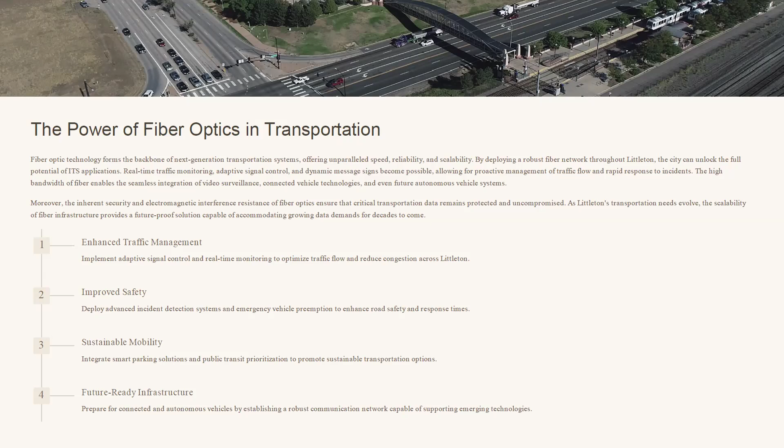Being Big Brother, the state and federal assume that smaller streets within a city are our own responsibility and we'll take care of them. They want to help when it's a roadway that has regional significance — where people not only in our city but others are using that roadway to get between places. That's why Broadway ended up becoming the focus first, because it was that regional roadway system.

We had a lot of other stuff going on, and we could find funding for it. So what we first installed was that section basically from Powers down to Arapahoe Road. That allowed us to get quite a few signals tied in there, but it also set the standard at the north end — if we were to connect with Englewood someday, now we're right near that border and can do that. It allowed us to get to Arapahoe Road, which was clear.

It allowed us to get to Arapahoe Road, which is where Centennial has their system coming in, and Arapahoe County does too, so we're able to tie into that. What we're doing on our own right now is Littleton Boulevard, because that's not considered a regional roadway system, but it ties Broadway back to basically this building — gets us back to where all our offices are, and Arapahoe County's building right across the street. So that's what we're working on now, putting fiber along Littleton Boulevard.

We're almost done with that design, and we have some funding for it. But of course, to your point before, Tom — when we started working on it, prices were X, and now they're 2X. Everything goes up.

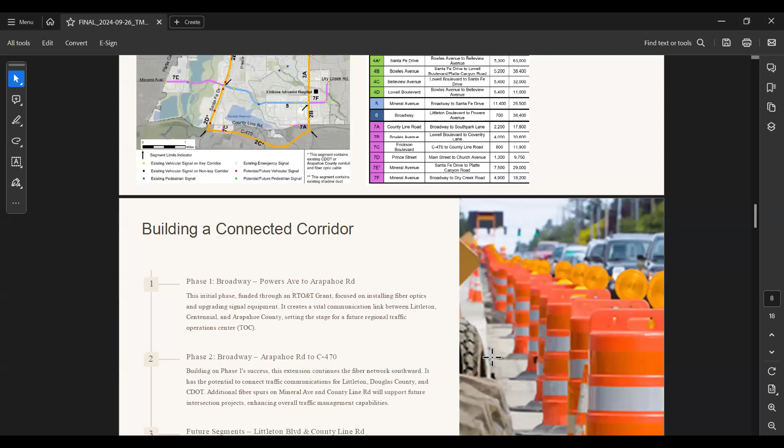Well, it goes way beyond that. Another part of it, when we put in fiber, we also upgrade all the other equipment at a signal. A lot of our equipment is very old and we've been prioritizing that also, to have controllers that allow us more flexibility with signal timing, leading pedestrian intervals, things we just couldn't do with our other controllers. They didn't have that capability. So one part is upgrading that equipment, another is connecting the fiber.

Fiber also allows us, because it's underground and you make it in a loop, to create a whole loop so you can get either way on it to everything. So if someone comes in and cuts that loop over here, we can still go the long way around and connect everything together. That's the other nice thing about fiber.

What we're using right now is radio communication, and it's line of sight. Trees keep growing, and you'd be amazed how many times all of a sudden we don't have communication. We'll go out there and go, oh yeah, that's why these trees have grown, and now it blocked your line of sight. So we don't want to have to keep cutting down trees just for line of sight with communication. That's another smaller aspect of it.

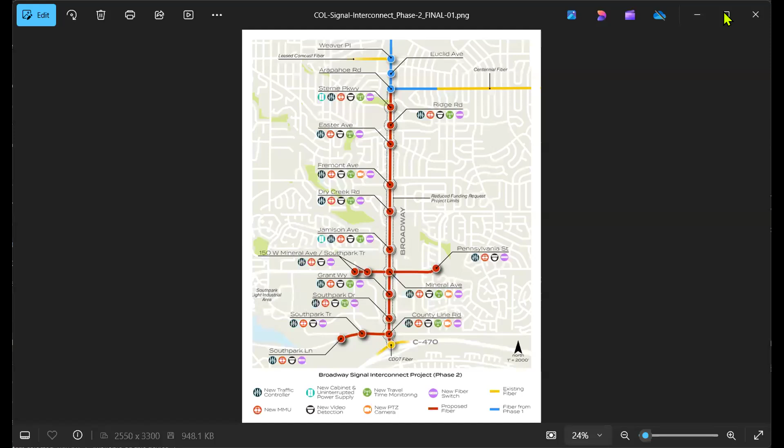But yeah, it gives a lot of flexibility. We can send a lot more data along that fiber than with anything else, both video images and also data for our IT department to share between buildings. So it's kind of a win for everybody, not just us. But it does allow us to connect all of our signals.

And we're also working with all the adjacent municipalities to connect with them too, because ideally, eventually, we want a transportation management system throughout Arapahoe County so we can help each other out and possibly share resources so we're not all having to do everything individually. That's the kind of behind-the-scenes discussion we have within this Arapahoe County Fiber Coalition that we're a part of, talking about what everybody is doing.

How do we share, if we have overlapping corridors that we're both interested in, how do we share those funds? But also, how do we share data eventually too, so that if there's a problem on one major road sending traffic to another major road, there's a way for us to convey that to other municipalities.

Because as we've talked about before, most people don't know, are they in Littleton now? Are they in Centennial, in Englewood? What road are they on at this point? They don't care. They just want to be able to get, whether they're driving, walking, or biking, from here to there, as quickly or as safely as possible.

Here's our application map for our application for the second phase of Broadway. You can see all those little icons represent a piece of equipment upgraded at each of those signals. And like Aaron was mentioning about connecting with other jurisdictions, we talked to both CDOT and Douglas County when preparing the application, asking if they were open to partnering with us and connecting this fiber so our systems can be connected once we actually put this in the ground. Both said they were open to talking about it.

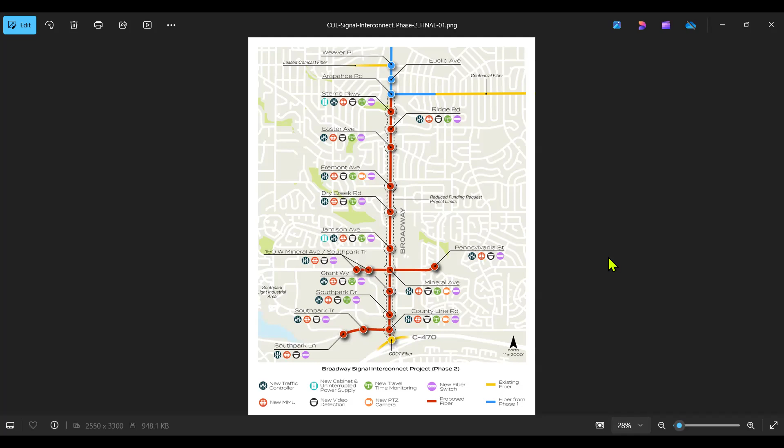So when I talk about putting fiber in the ground, that doesn't just get shared with IT, it gets shared with our police dispatch right next door here also, so they can be aware of an incident and get police or fire out there that much quicker when something happens. So it's about having access for them to more cameras around our city to see if something's going on that they need to respond to.

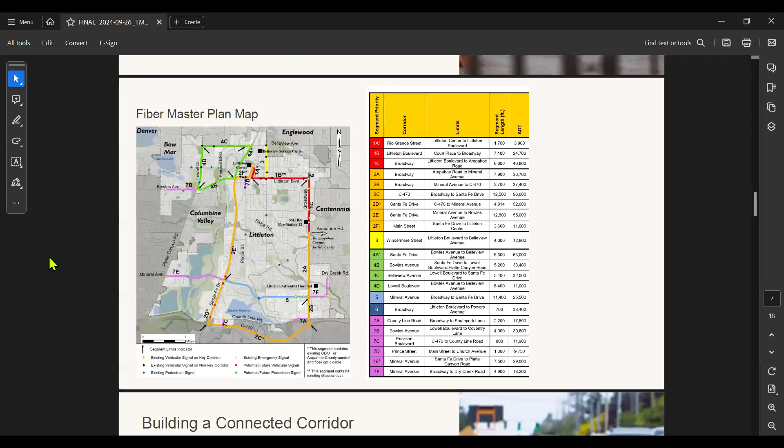So Aaron, you talked about that interface to the cameras. Will this also enable at some point us to be able to tie in so you can see the number of cell signals congregating along given pathways, and even, there's probably a GPS tie-in to see how fast those signals are moving. I know that's out there, I don't know how far away, but is this going to be an enabler for that?

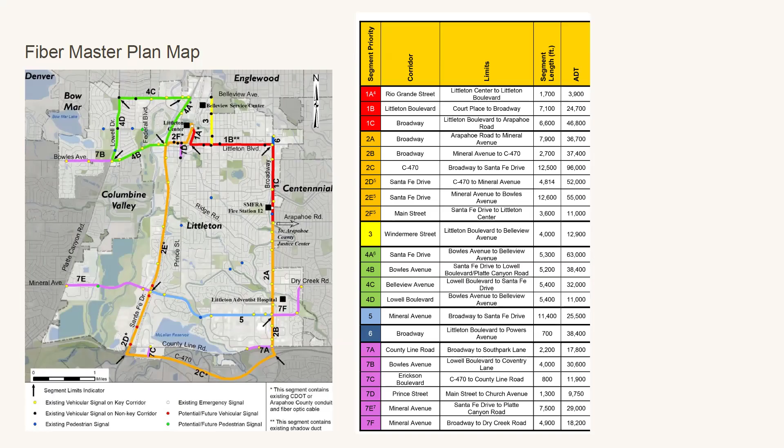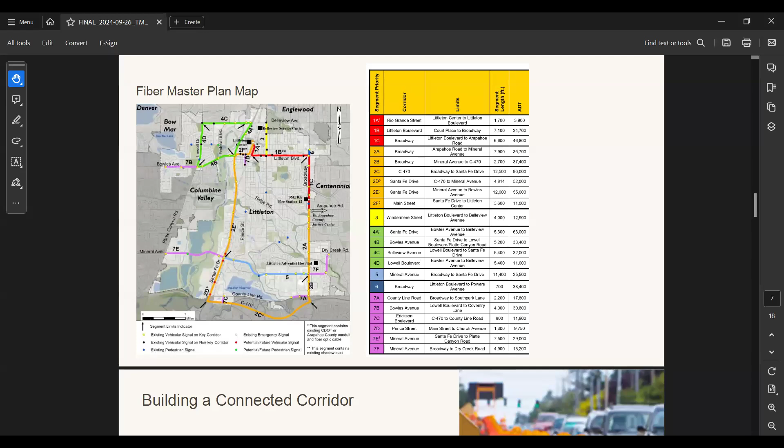Most definitely. One of those pieces of equipment that was an icon up there is something called an Acyclica that we've been putting on different corridors. It's basically a box that goes on our controllers that allows us to track anonymously someone that goes by with Wi-Fi or Bluetooth, assigns a long 20-digit number to that vehicle or person, and then tracks how long it took them to get through the corridor. Over time, as we expand that across the city, it'll give us the ability to say, hey, this should take 5 minutes but it's taking 20 minutes on this corridor. It could start giving us alerts so we can look at things quicker.

And again, if there's an incident, get that to dispatch and police to respond. So ultimately what we'd like to get to is the ability to tie that to information sources, real time to people.

So if you identified my Bluetooth and I went from County Line Road to Powers in 30 seconds, would that be enforceable? That's what I'm wondering. That isn't right now, but that certainly could be something in the future if the police wanted to take that on.

Yeah, we're still struggling with photo radar at this point, so. That's how it was when I rented my car in Australia, they said do not speed. They have cameras on the overpasses and it's a math question, they'll send you a ticket if you went faster than what is possible. They said it's all automated. There's no, I'm from America, the laws of physics don't apply to me.

At 30 seconds, they would be like, this is junk data, something went wrong. But yes, I think the point is the data is all anonymized right now. We have these travel time monitors on Santa Fe, and I get a text to my phone if the travel times on Santa Fe are outside of a normal range, but it doesn't tell me like Robert was going 67 on Santa Fe today, you better go talk to him. It just says, hey, we're seeing consistently it's taking extra time to go from point A to point B, so you need to know something is going on. Could be a crash, could be something else.

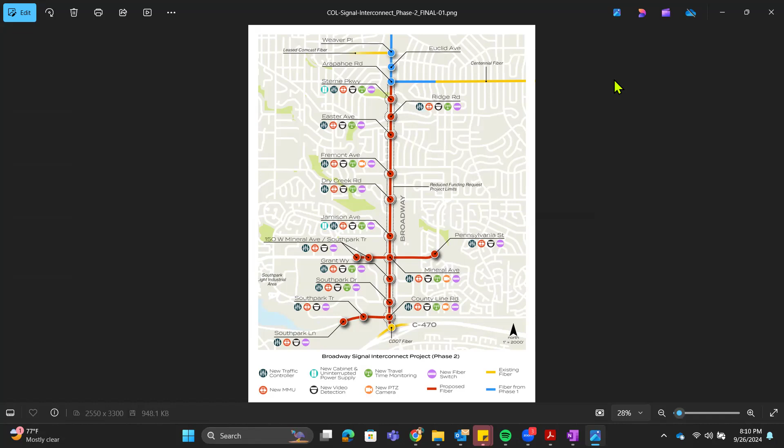We got 20 minutes left. Do we have time to do the last topic on the agenda tonight? Should we? Can we hang for another? I mean, I don't know unless there was anything else on that, but I thought that was pretty good coverage on fibers, appreciate that. It's plenty for me. We dug in, we got more than I thought we would.

I did not. So this is our last item. Am I presenting this too? I don't know. I can do it. I can give it a try. Let Kenna, she'll present, buy your lunch. Whoever does it gets a piece of chocolate. There we go, I'm joking. I'm happy to present this, and Aaron, obviously you can join in.

This was actually a presentation we modified a bit. We presented this to the South Platte Working Group, which meets - it's a coalition of cities, South Suburban, Arapahoe County Open Space, and a bunch of people who work along or have a stake in the game along the South Platte River. They asked us to come present this, and we thought this would be a good presentation to give to you all, just an update about all of the work going on around Santa Fe and Mineral, because we have a lot of work going on.

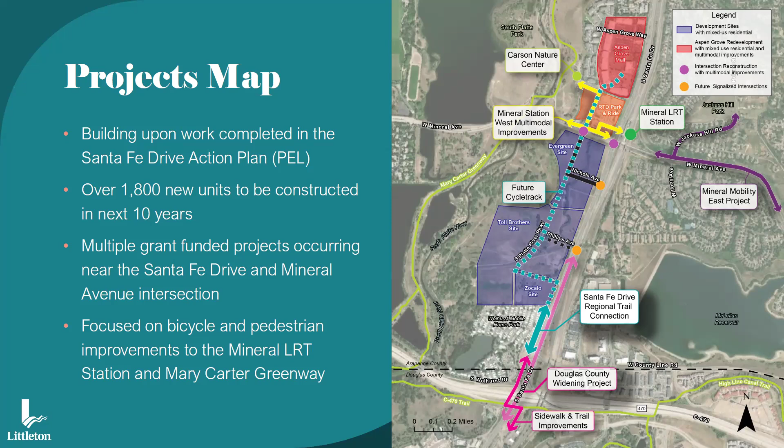Again, we're trying not to just focus on Littleton, but how do we connect outside of Littleton too. We've talked about the County Line project before, doing a shared use path along County Line from Broadway to connect to the C-470 and High Line Canal Trail. That's not even in the city of Littleton, most of it's in Douglas County, but we see it as a benefit to Littleton citizens to connect them to the regional trail system.

Yeah. All right. Next slide. Not yet. Yeah, go back.

So, Santa Fe Drive and Mineral Avenue intersection improvements—this is the famous quad road, which you can direct all of those questions to Aaron. As part of the Platte River Parkway extension, we will have a behind-the-curb cycle track.

This is an old graphic, so I don't know if it ended up being 9 feet or 10 feet, but that's close enough—almost 10 feet of a two-way cycle track. There will be a 1 foot buffer area, and then sidewalk, and then a landscape buffer between the actual roadway and these amenities along that Platte River Parkway.

There's more to this too. Not only are we putting a cycle track outside the roadway, but we're also prioritizing that cycle track and sidewalk when it crosses a driveway. Typically across the city you'd ramp down, go across the driveway, ramp back up—we're not doing that here. It stays at the same level, and people on the driveway will go up and over instead.

Because we want drivers to understand you are entering a different area—behave differently when you go up on this, since it's a safe zone.

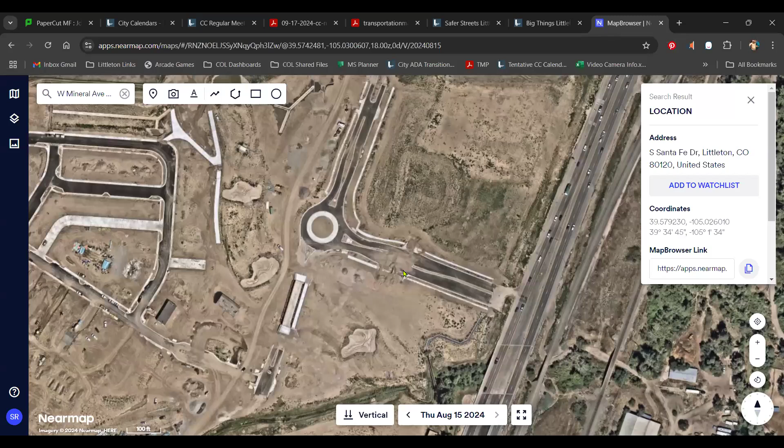We expect to be going to ad, where we advertise it for anyone to bid on, hopefully in 2024. So that we can start to construct early in 2025. We think it's about an 18 to 22 month construction timeframe, so it would be done by the summer of 2026.

The cycle tracks themselves, we've actually put that responsibility on the developers, because as they build those blocks there's going to be people there who want to use them, so we're making them build them at the same time. That's not going to be built as part of the quad road project, but those two developments, Evergreen and Toll Brothers, are under construction now also. Toll Brothers is further ahead, so they're building all their infrastructure now, which will include the cycle track and sidewalks before they can start occupying it. Evergreen will have to do the same thing - before they can get certificates of occupancy, they have to have built the whole infrastructure that we've agreed upon.

This is current - this is the Toll Brothers site, so the red arrow is Santa Fe and Mineral. I'd actually say this is a little old, from August. If you really want to see what's going on at Toll Brothers, I suggest you go up on County Line to South Park Circle, just east of Santa Fe. If you go up to the top of it, you have a view that looks down on all the construction happening there.

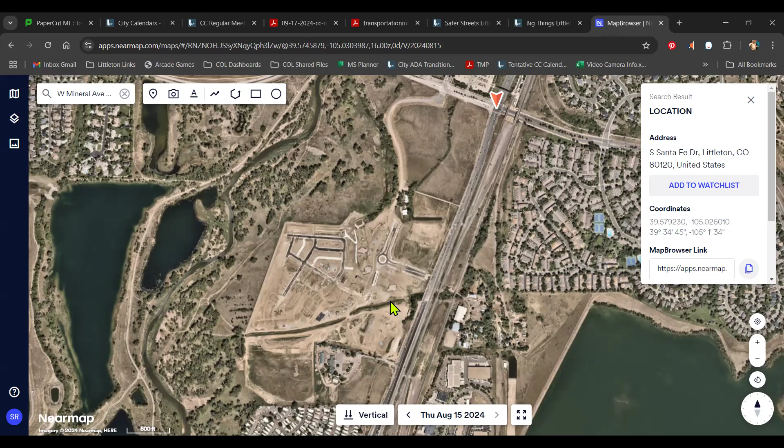There's a lot of exciting stuff happening as part of this project. When we talk about Littleton in general, I know a lot of the frustrations you've heard from us because our system is so old - it's hard to just go and put something new in. You have to have enough space, enough right of way to do that. Well, we had an area out here where we did have enough space, so we're trying to design it the best we can so that we have the best facilities out there.

For those roundabouts, will that be the bike in the roundabout or separate? The bike will go outside - it'll have its own crossing separate from the roundabout.

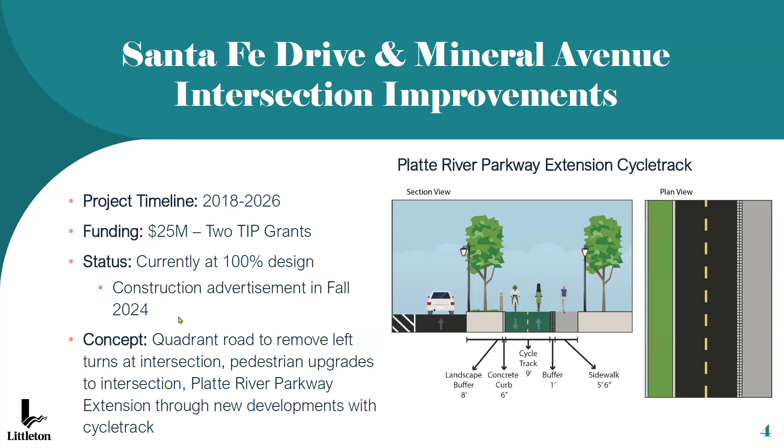So Mineral Mobility East, this is another one, they're all grant funded projects in this area. This was a TIP grant. Santa Fe and Mineral had 2 TIP grants.

So this is really looking at how to connect people on the east side of Santa Fe along Mineral to the light rail station. There are multiple different aspects to this project.

One is paving the Mineral Trail between Jackass Hill Road and the High Line Canal. Some at-grade improvements at the High Line Canal Trail. We are going to be doing an underpass feasibility study for that crossing, starting later this year. We will be redoing the intersection of Mineral and Jackass Hill Road, which will be a protected bicycle intersection. We will be adding buffered bike lanes that can eventually become protected bike lanes along Jackass Hill Road, and then improvements to the High Line Canal crossing of Jackass Hill Road.

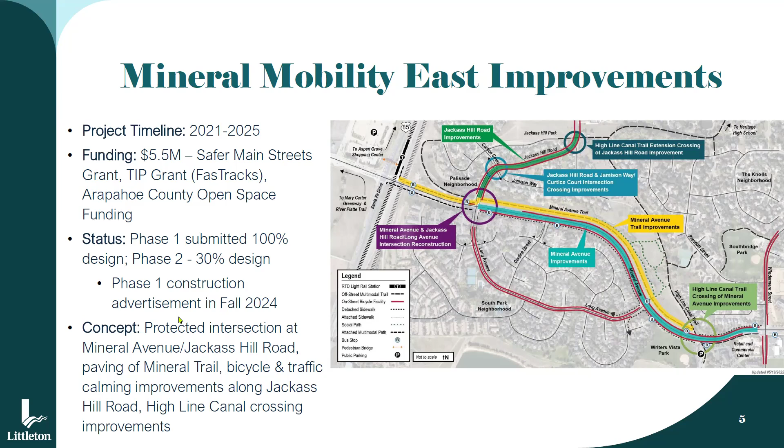So you're right, there's improvements happening on the south side also to make it easier to get through the system, but we still recognize anything grade separated, whether an overpass or underpass, is going to be the highest level of safety and comfort for people. Yeah, that's the long-term goal. Hannah, thank you for that.

Fantastic, we're not done, one more slide. Oh, there's one more slide? Well, there's like two more slides. Okay, all right, we can be really fast.

So this is Mineral Station West, looking at how to get people on the west side of Santa Fe a better connection to the light rail station and the Mary Carter Greenway. So we are going to take the southern path here.

Right now there are some steps here, so we're going to remove those so that it's not an official bike path, but as a bicyclist you would still be able to use it.

Those are the main improvements here, and then we're going to extend that cycle track that's on the new development south, all the way along Platte River Parkway up to Panera. The Aspen Grove redevelopment is actually going to continue that cycle track within their property.

And then we're going to do some improvements on Carson Drive to connect to the Carson Nature Center and the Mary Carter Greenway. The red shown isn't part of our project, but we've talked to Aspen Grove about the vision of how to get their mall better connected to the light rail station as well.

Building some sort of trail connection. When they build that phase 1 building, it's going to look totally different, so it won't have its back to the light rail station anymore, it'll turn more and have two sides to it, so people can come out that side and go right better to light rail.

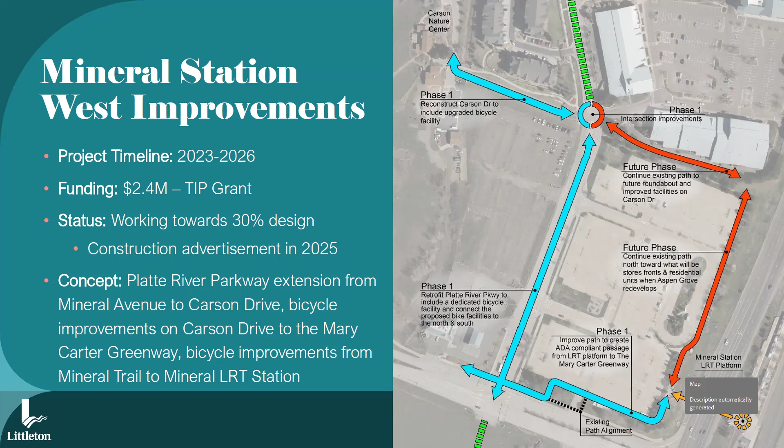So the very last project, which I already touched on, is this connection here. This was another Arapahoe County open space grant we were awarded to do design work on.

So the developer, Zocalo, will be responsible for Platte River Parkway coming here, and then they'll do this little L connection. This is the Wolhurst mobile home park here, and this is where the gap is that we'll be designing that trail connection.

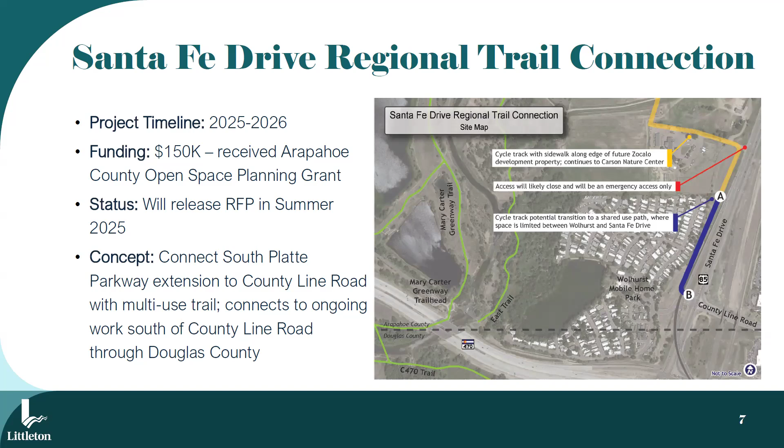As part of phase 2 of the Santa Fe PEL study, we looked at this whole area and how to connect over to the Mary Carter Greenway for all these developments. That's separate from what we applied for here, but it's kind of shown in here, where we're looking with South Suburban about getting a new crossing over the river for all this new development, the 1,800 units being built on this side, to get them directly over to the Mary Carter Greenway.

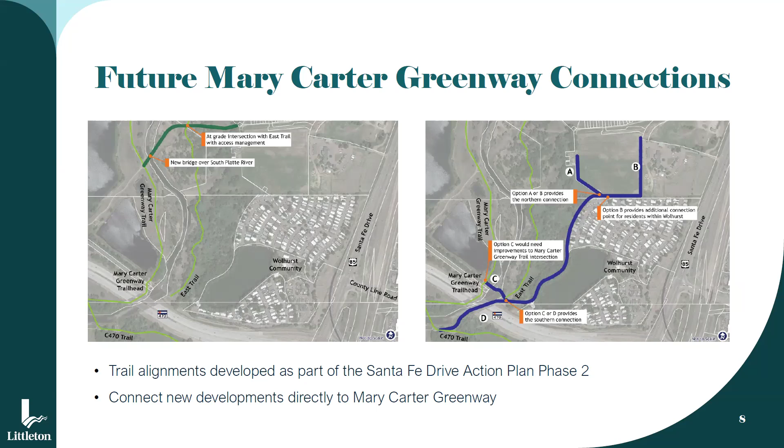South Suburban sees that as a benefit too, because they don't want everyone destroying the east side. They're trying to keep it more preserved as natural and get everyone to the west side if they want to use the trail system on their bike or with pets. So that's now been coordinated with South Suburban in their Mary Carter Greenway master plan to do that work in the future. No set date, no budget, but at least we've identified where that can occur, so it's a good first step.

That's a ton of projects, yeah. Good, thanks, great job. Tired? Well, yeah, you're tired just watching it.